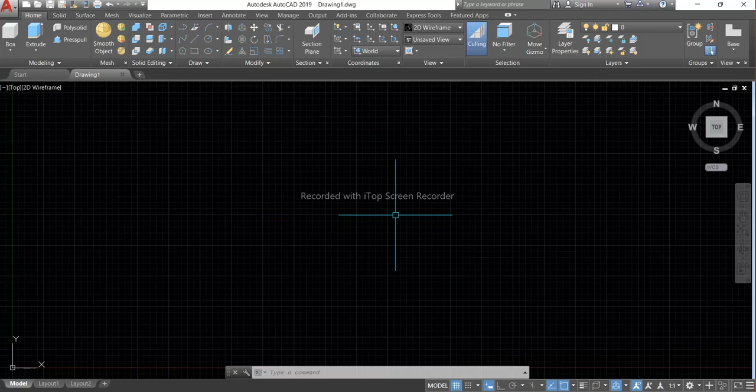So here it is our working space. First we have to set our unit. We have to set our unit in mm first.

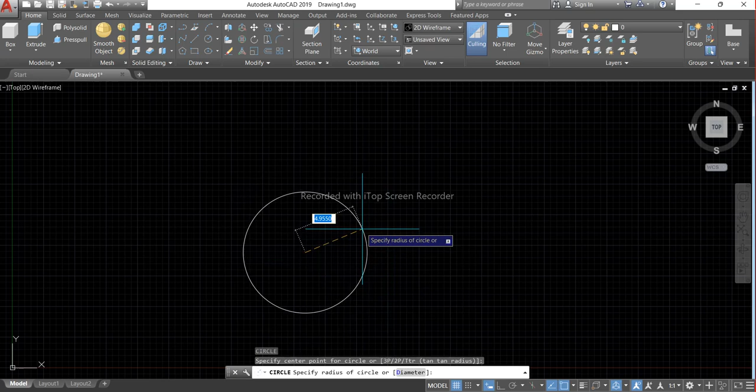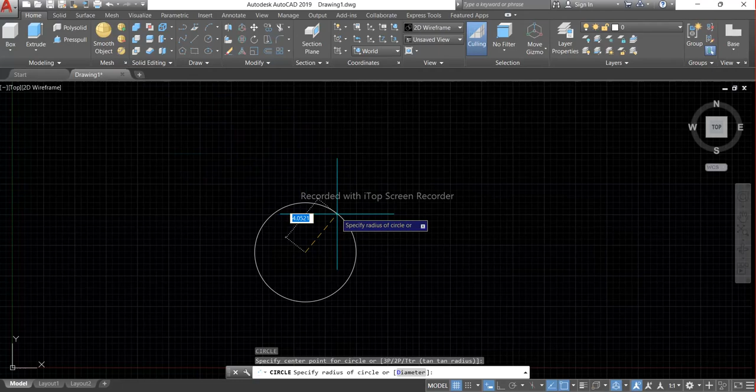We will choose the circle command, and we will give the radius of first 18 mm and second will be 56 mm. So first radius is 18 mm and second one is 56.

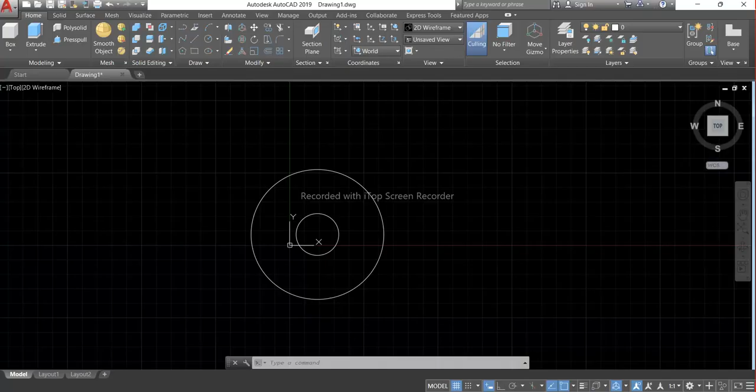After that we have to make this distance, and after that we will create this circle. So let's start. Choose line command and track the line, give the distance 15 mm, and press enter.

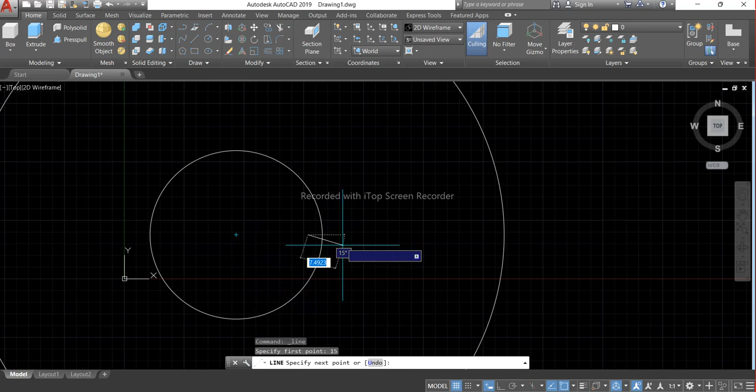Now we are at a distance of 15 mm. So turn ortho mode on, and enter the distance 114, press enter.

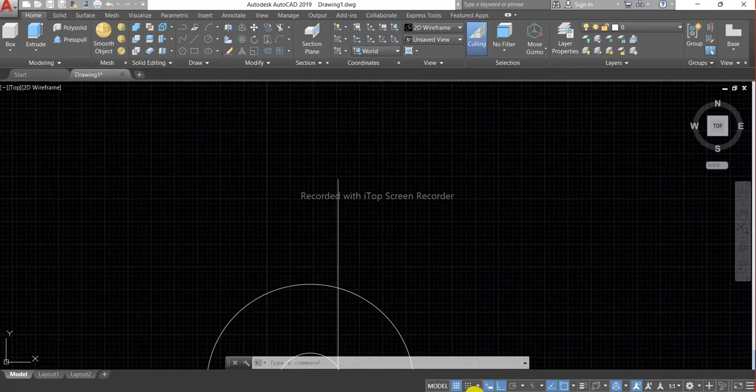After that we will make these two circles, which have a radius of 22 mm and second one a radius of 42 mm. Enter, and give the radius of 22 mm and second one 42 mm.

After making it we will make the center line, and the center line is inclined at 135 degrees with this line. So we have to make it first. Let's make it.

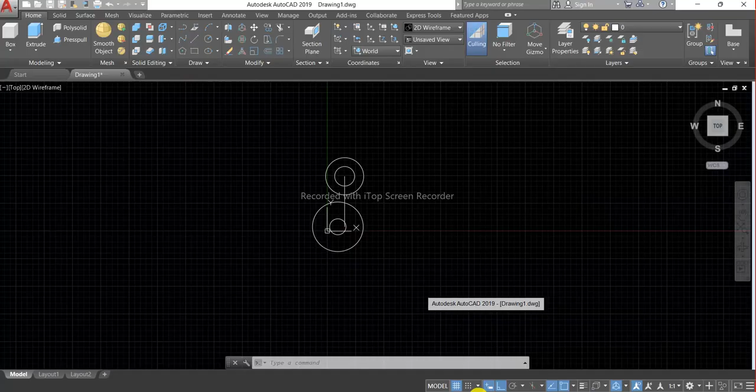Choose line command and turn ortho mode off, and in this drawing we are making the angle from here. So if we subtract 135 degrees from 180 degrees, we will find 45 degrees.

So here we will feed the angle 45 degrees. Let's see the distance of this line. The distance is 150 mm. So give the distance 150, and to shift from length to angle we have to press the tab key on the keyboard. So we shifted to angle, feed the angle of 45 degrees.

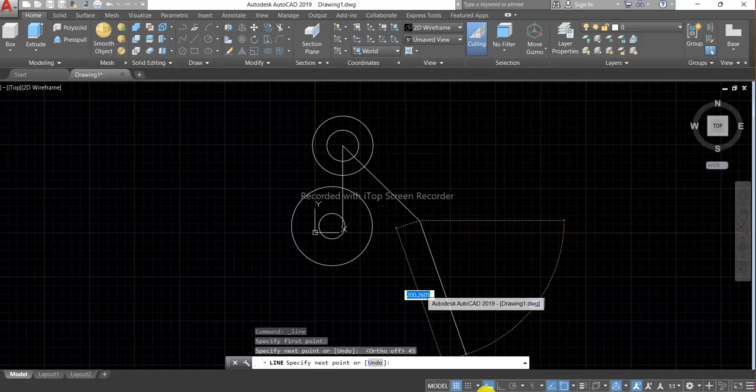And we have to make a second line with a length of 75 mm. We will do the same thing for this line also. Feed the distance 75 and press the tab key on the keyboard, and give the rotation angle of 45.

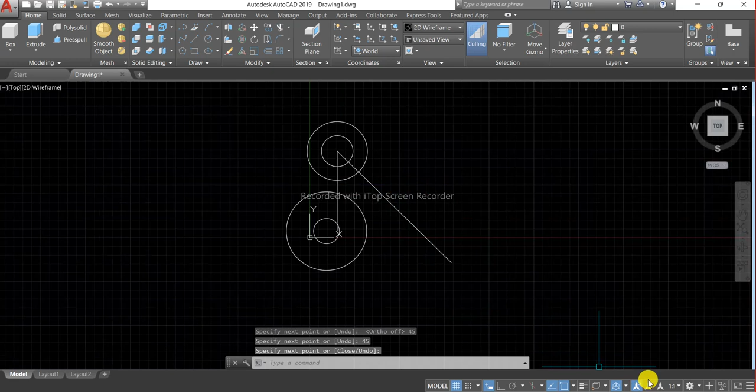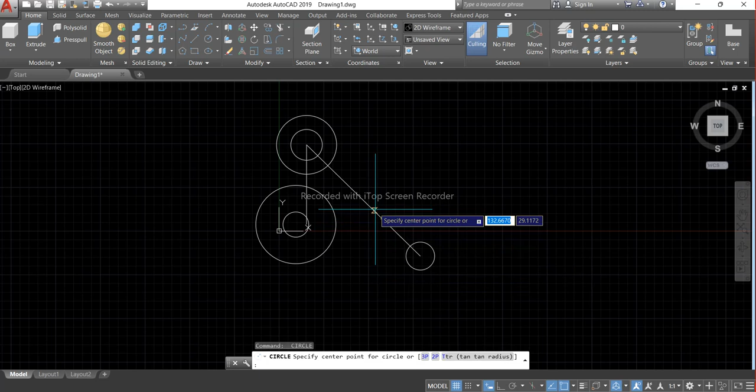After making it, we will create this circle and this circle also. The radius of the circle is 20 mm. We will feed the radius of 20, and make another circle with a radius of 20.

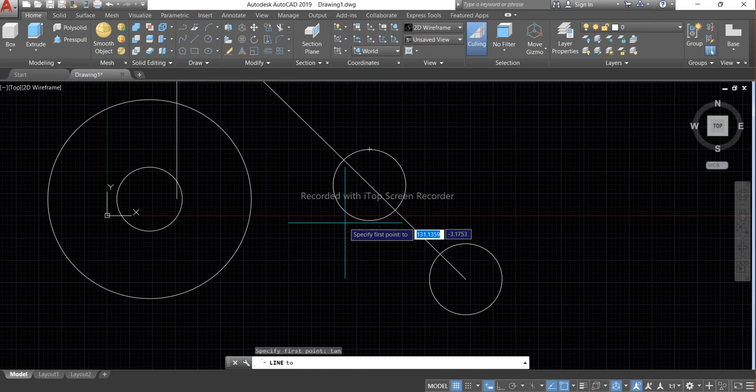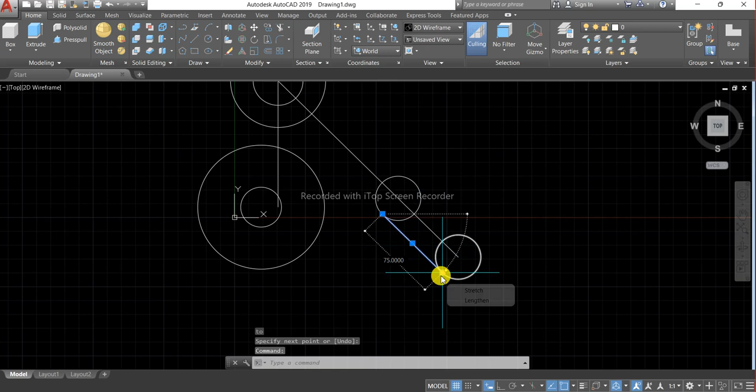And we will join these two circles with the line command. So we have to choose tan, click in this region, press tan again and press enter, and choose this region. After that we will mirror it like this, and trim the extra portion, erase this line.

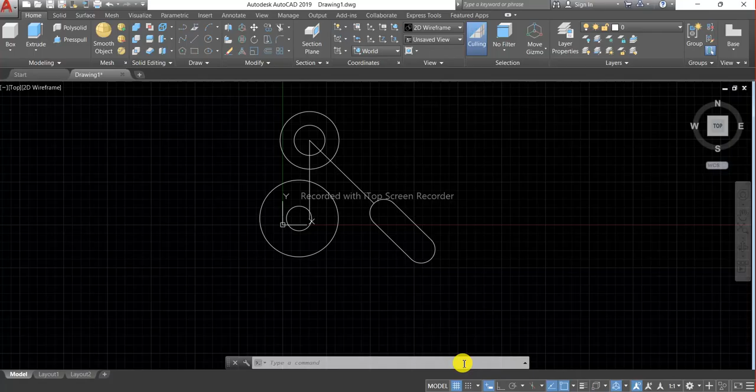After making this, we will make this portion. The radius of this reference circle is 140 mm. So let's make this circle. First press C and enter, and give 140.

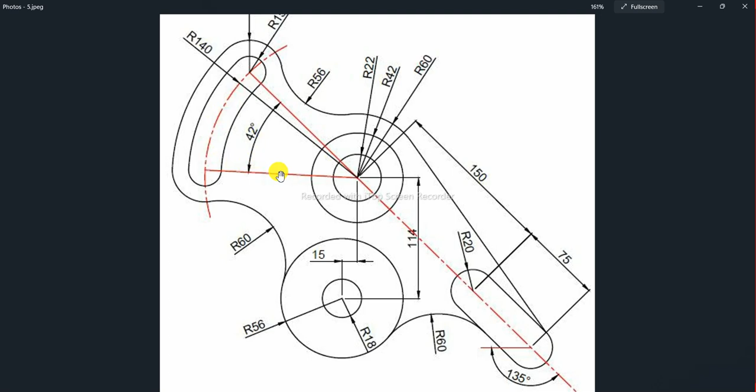After making it, we have to find these two circles' center points. The first one and second one. So we have to find this circle's center. The angle between this line and this line is 42 degrees. So we have to make this line with the angle of 138 degrees. Let's make it.

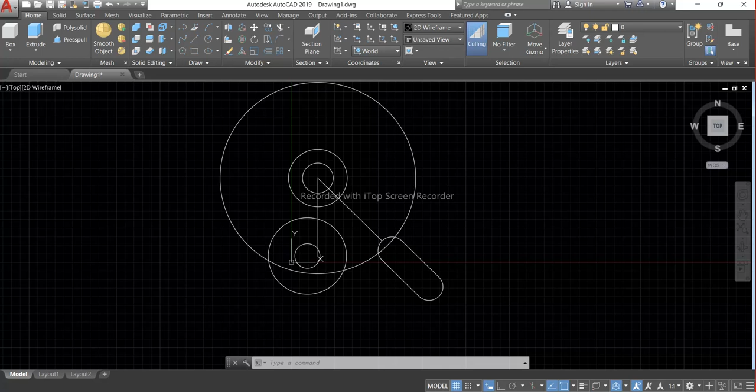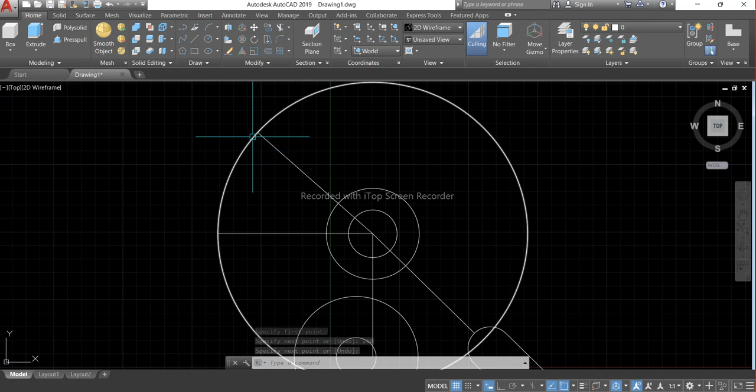Choose line command and give the length of this line 140, press tab, and give the angle of 138, and make another line with the length of 140. Here we find the two center points.

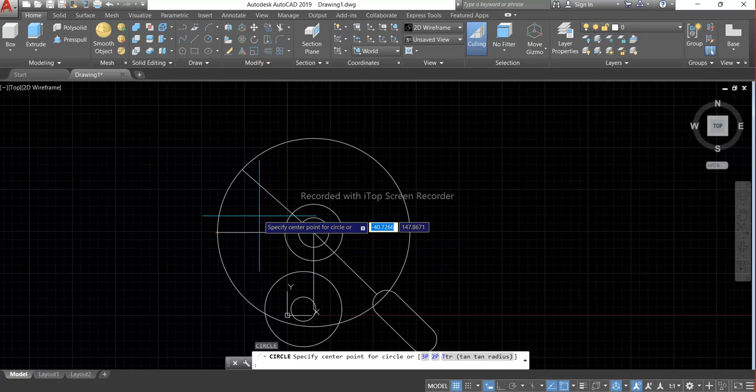So let's make the first circle, which has a radius of 15 mm. And we will make another circle with a radius of 30 mm.

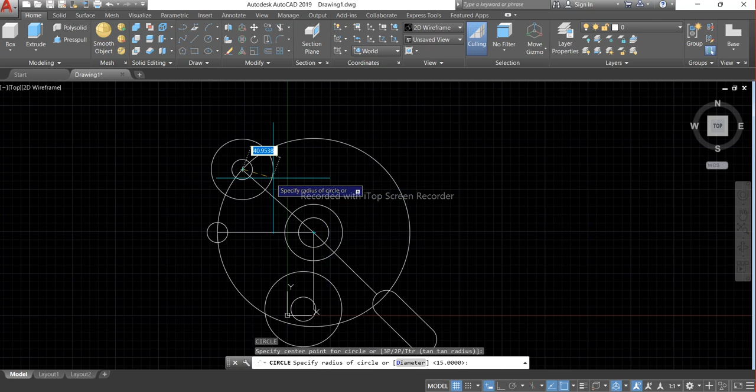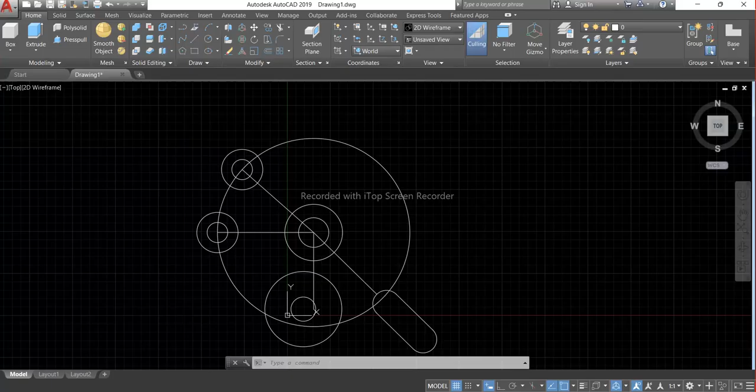And now we have to make this arc, so we have to make another circle with the radius of 170 mm. Let's make it: C, enter, and fit the value 170, enter.

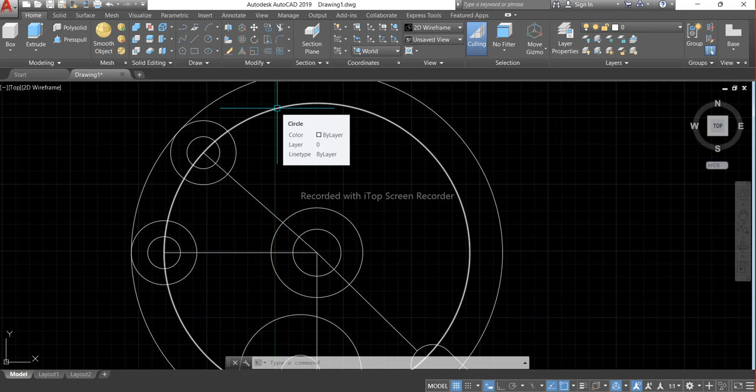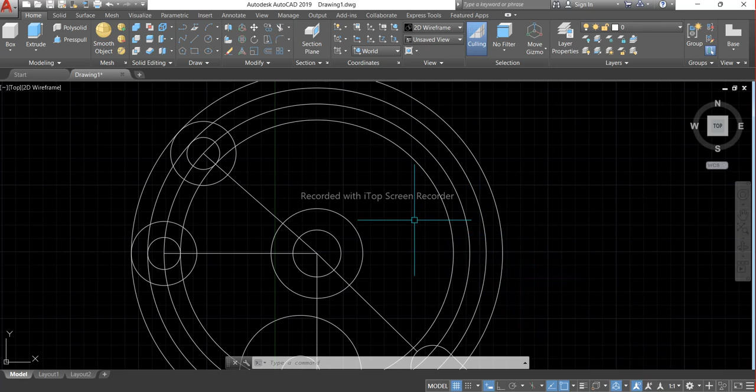And we have to offset this circle in the inner area and outer area also. Press O, enter, give 15 mm. Now it's time to trim the extra portion. For trim all the extra portions, we enter TR, then press space bar twice so we can easily erase the extra portions.

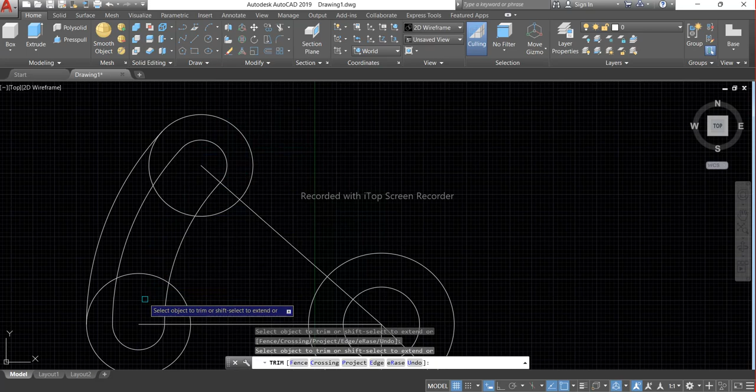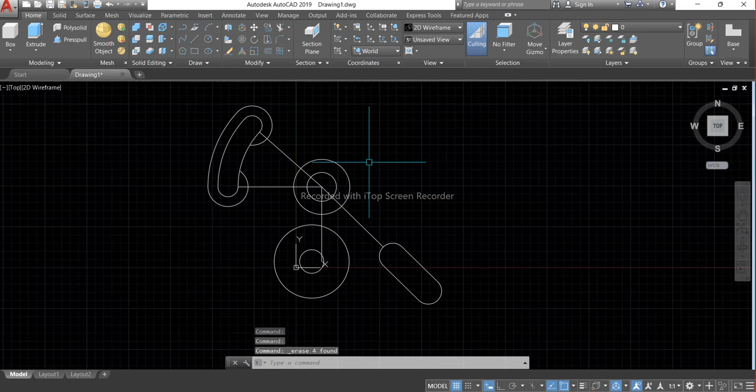We will erase it, and it's time to make another circle with the radius of 60 mm. Press C, enter, and give the radius 60.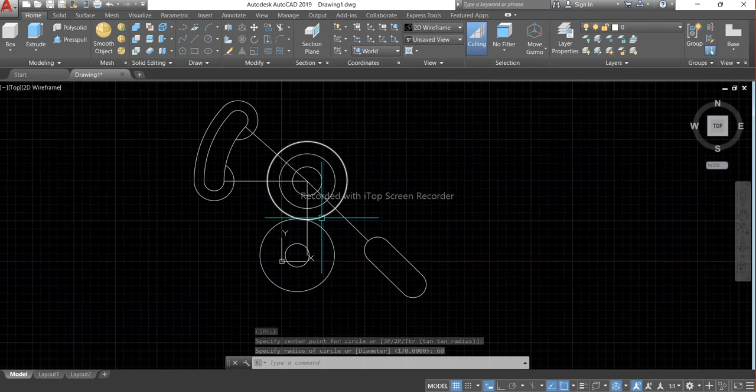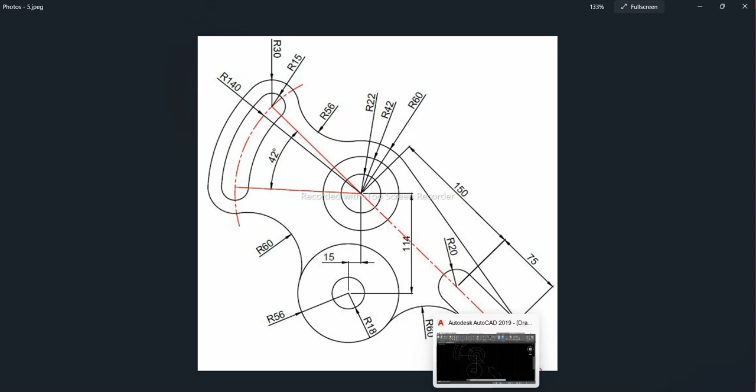After making it, we have to make this arc, this arc, this arc also, and one straight line which is tangent with this circle and this circle also. So what we will do for making this arc and line is choose the tan tan radius command, which is very helpful for making tangent circles easily. So we are going to choose this command.

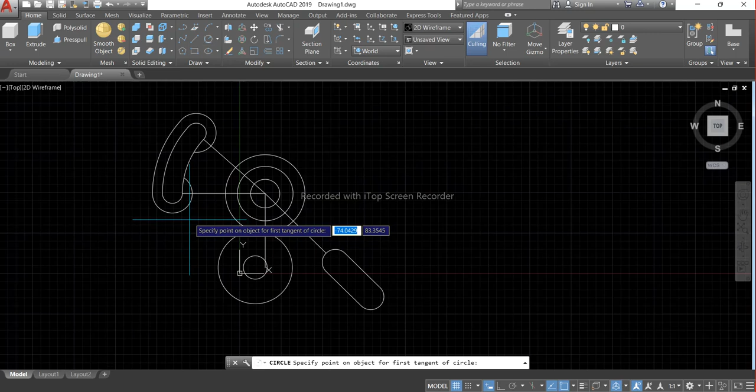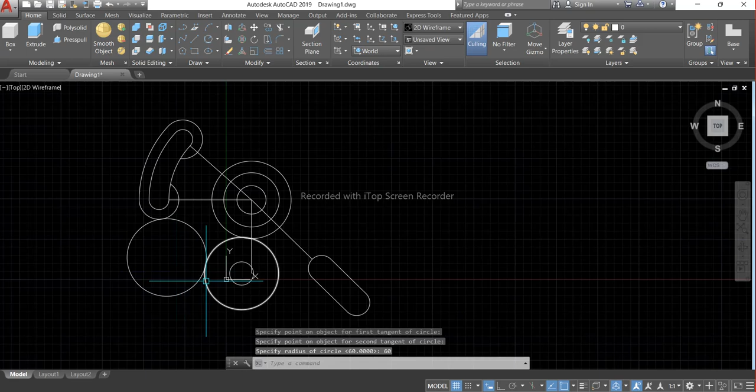First we have to choose it, click here first and click here second, and after that fit the radius, which is 60. Fit the radius 60 and enter. So we see that we made the circle tangent with this circle and this circle also.

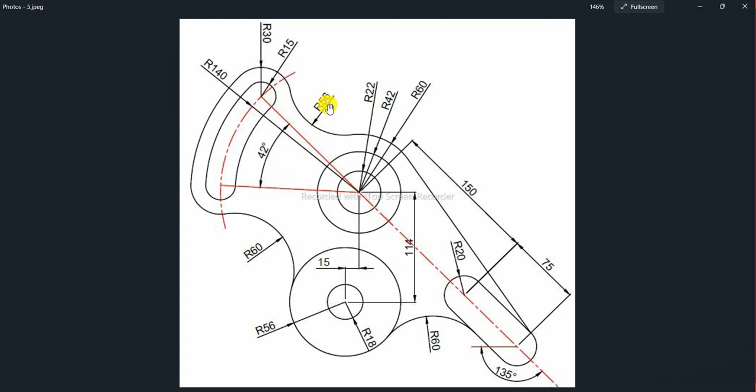Here again we will make the second arc, which has a radius of 56 mm. We have to press space or enter bar to select the tan tan radius command again. Press... sorry, it's not working right now.

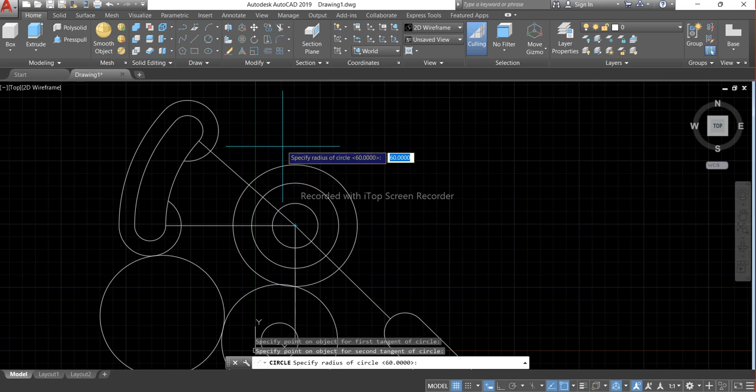So let's choose from here. First choose there and second choose here, and we have to feed 56 mm. Here it is. Now it's time to make another arc or circle with the radius of 60.

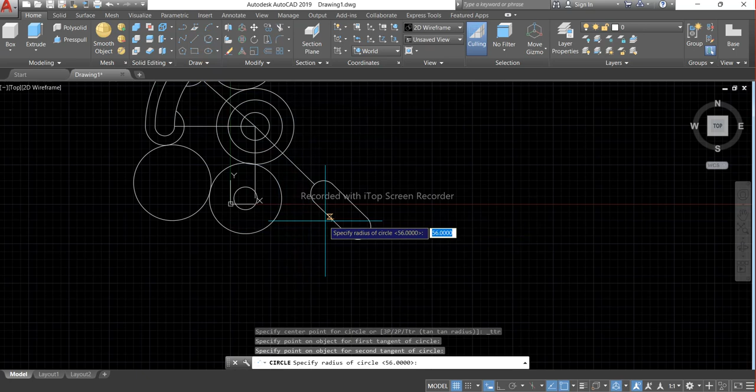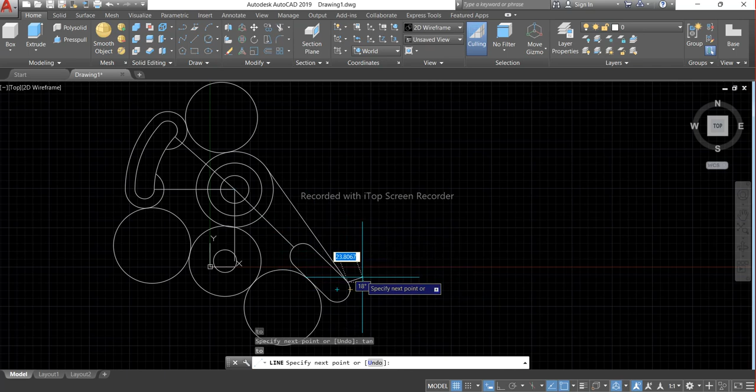Choose line command and press tan, enter. Click here and again press tan, enter, and click anywhere on this circle. So here it is. It's time to trim the extra portion.

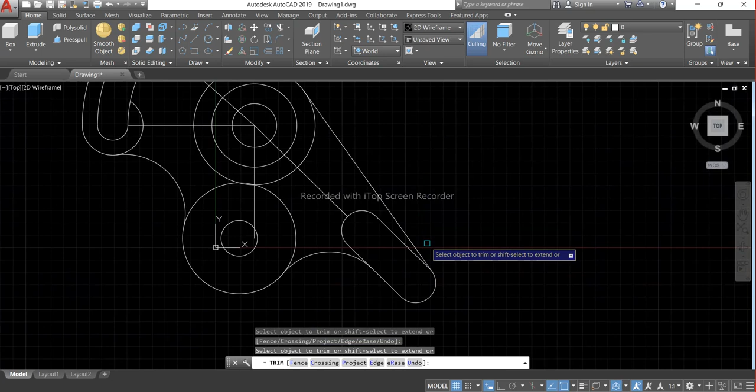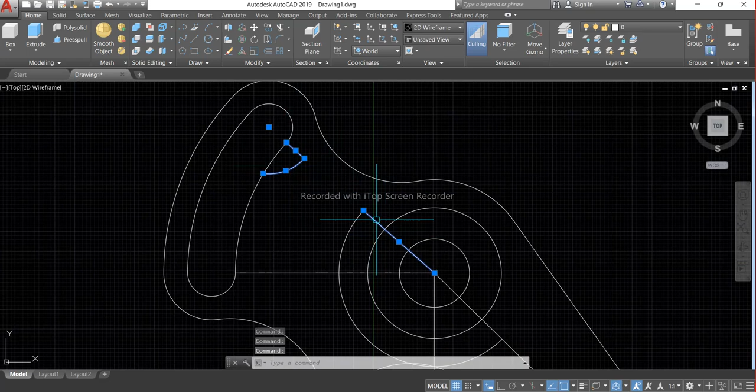For the trim, we have to press TR, double enter. And next we have to erase these lines, because here there is no longer use of these lines.

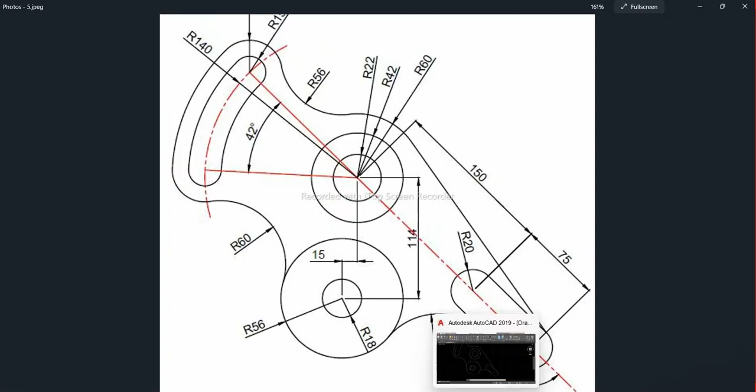So here our drawing is ready. With this command we made this drawing. Thank you.